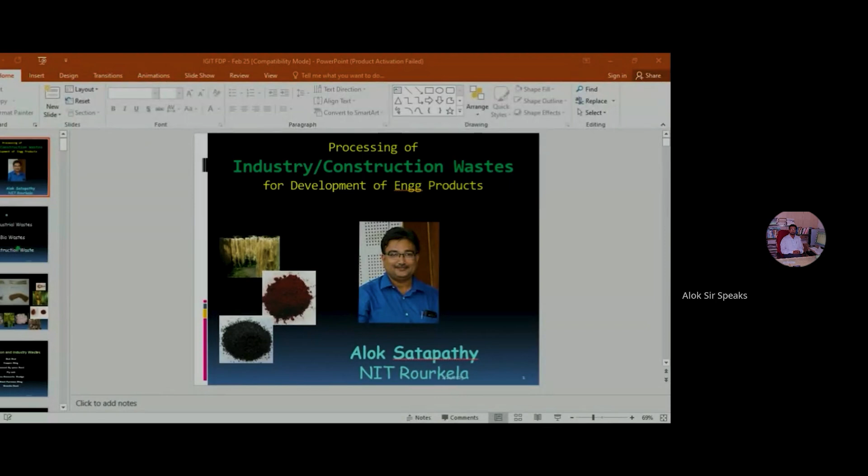My talk today will not be an in-depth talk about any waste to wealth conversion, but through this talk I would like to generate in you certain inspiration or drive, so that you can think of the wastes around you and try to convert them to some kind of valuable product by using proper engineering technique. In this context, we will be discussing waste - industrial waste, bio waste, and construction waste.

Now, what are the different bio wastes and what can we do about it? And what are the different kinds of industrial waste and what can we do about it? We can do many things, but today I'll be talking about two major engineering products. One is how we can use some of these wastes to convert them to polymer composites for various engineering purposes, structural and technical components, and also how to use these industrial or construction wastes for making thermal spray coatings.

Now you can see in the picture a host of natural elements, very common and abundant natural elements. You can see cantala fiber, banana fiber, sisal fiber. Then you can see here the scale of fish.

You can see the feather of a chicken or poultry feathers, a coconut tree and coconut leaves. All these are bioresources, and most of them are considered agricultural or biological wastes in our day-to-day life. All these things can be used, provided we judiciously select the appropriate mode of technology and processes.

Now, some notable construction and industry wastes are red mud, which is a waste from alumina refineries, copper slag, cement bypass dust, fly ash, LD sludge, blast furnace slag, granite dust. The list is in fact very long, and I am only giving a few wastes which are available in our surroundings.

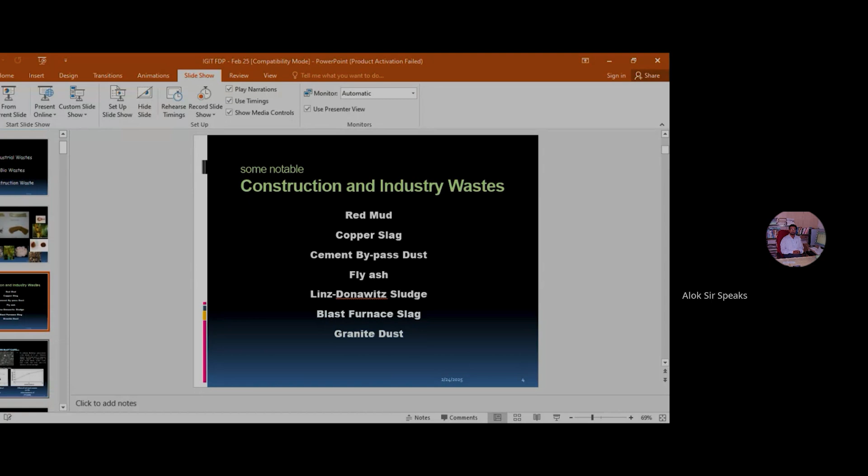Now coming to red mud one by one. Red mud is an aluminium plant, alumina plant waste. Alumina means it is the first step in the extraction of aluminium, conversion of bauxite to alumina, and in the smelter, alumina is further dissociated to form aluminium metal.

Now, our group has tried this red mud as a potential filler in polymer composites, in epoxy, in polyester, and in some thermoplastic materials like polypropylene. We have used red mud as a filler material and got some interesting results. Our purpose was to establish that red mud, in spite of being a waste, can be used for this purpose. Even in my own doctoral work, we have tried to develop coatings out of red mud.

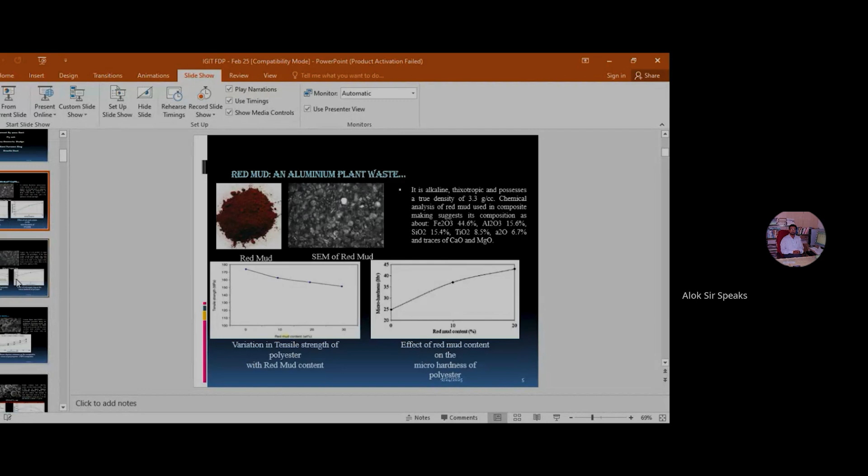Red mud is waste, because normally in coating, the conventional coating materials are very costly. So by using an industrial waste, we reduce the cost of the raw material and develop some kind of product which is comparable with a conventional product.

Copper slag is another waste generated in copper industries, and most of the constituents are metal oxides only - ceramics, iron oxide, silicon oxide, calcium oxide, and so on. Copper slag is generated in a copper extraction plant, and it has also been tried by many researchers, including us, for making polymer composites with different types of polymer matrices.

Another common and abundantly available waste is fly ash. We are all conversant with fly ash bricks - most houses nowadays are constructed with fly ash bricks instead of red brick. Fly ash is the waste generated during the combustion of coal in the power generation process in thermal power plants. In the eastern region of India, most power plants are coal-based, so we have abundantly available fly ash, dumped in the form of hillocks or ponds in the vicinity of the power plant.

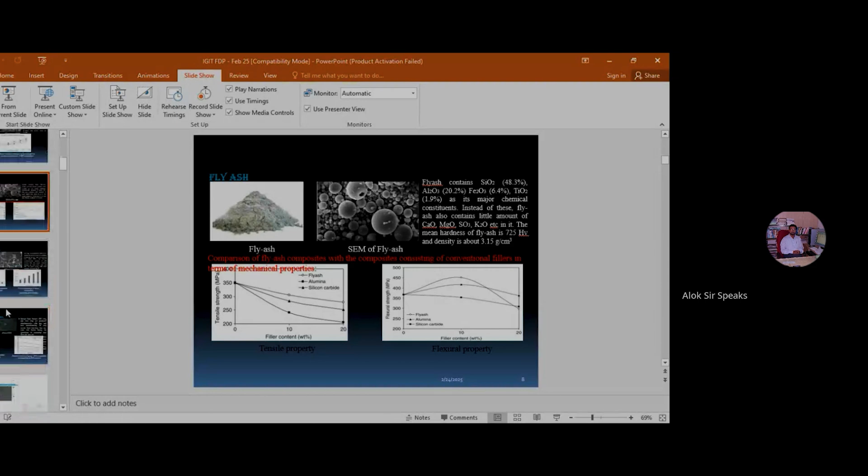Most of the fly ash is used for making bricks, or a part is utilized for making cement. In spite of that, a lot of fly ash is dumped as waste. So researchers have tried to use this fly ash as particulate filler in polymer composites, so that a value-added product can be made out of this waste. Fly ash is again a mixture of ceramic oxides, mostly silica oxide, iron oxide, and aluminum oxide.

Then LD sludge. In steel plants, the iron-to-steel conversion takes place in LD furnaces, and in the process of steel making, there is a sludge or waste developed called LD sludge. LD sludge basically contains iron oxide, calcium oxide, silicon oxide, and so on. And this waste is simply dumped in the steel plant site.

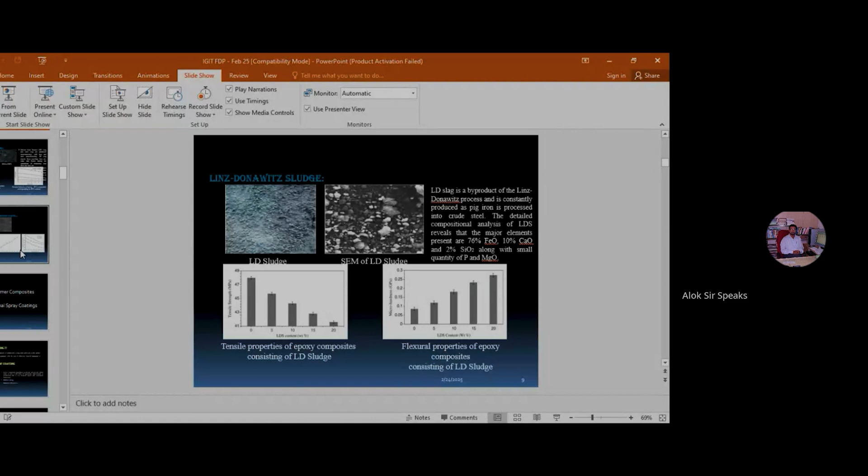I come from a steel city, and we see there a huge deposit or dumping of LD sludge and blast furnace slag all around the steel plant, and their utilization potential is very low. It is hardly being utilized except for pit filling and road making. So we made an attempt to use these in polymer composites, where conventional filler materials are replaced with this waste. In the process, we are successful in reducing the cost of the composite.

Coming to construction waste, what are different construction wastes? So far, the wastes we discussed are industry wastes. Now, if you consider construction waste, the major ones are marble dust and granite dust, because most high-end houses these days are made up of marble.

The floorings are made up of marble or granite, and in the marble and granite processing units, cutting units, there is a huge amount of granite dust and marble dust generated, which creates health hazards. These are not used anyway for any other purpose, but instead they are causing health hazards in the vicinity. People who inhale them while breathing suffer from various diseases.

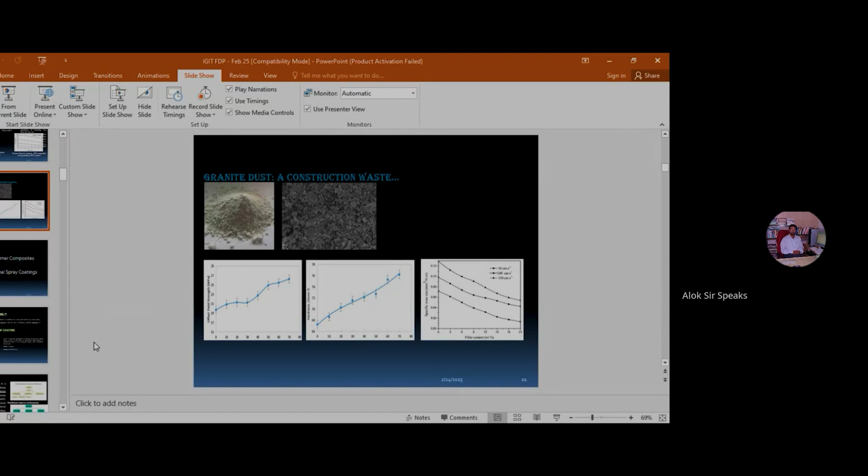So granite dust and marble dust are considered nowadays as potential material for making different engineering products. One such engineering product that we will discuss here for marble dust is polymer composite, and another is high velocity oxyfuel spray coatings made up of marble dust. So basically we will be focusing on these two products: polymer composites in general and thermal spray coatings.

Now, what are these things? What is a coating basically? Coating is a layer of material which is formed naturally or synthetically, or deposited artificially, on the surface of any object made up of another material.

For example, you have a stainless steel substrate, and you want to coat it with a very high or hard material. So you can coat it with aluminum nitride or silicon carbide. Then what happens? The surface becomes very hard, whereas the core is the stainless steel or mild steel. This helps the material or engineering component withstand the environmental attacks which are likely to occur in the process of operation at the workplace.

For example, suppose there are two mild steel machine parts which are in relative motion with each other. There will be friction, wear and tear, and after some time what will happen? They wear out from the surface, and there will be noise, mismatch in dimension, more energy loss, unnecessary heat generation - all those problems will come.

But if you coat them with some harder material, say titanium nitride, what happens? The surface of both members becomes very strong, very hard. When they become very hard, then in spite of repeated sliding, the rate of wear and tear will become drastically reduced.

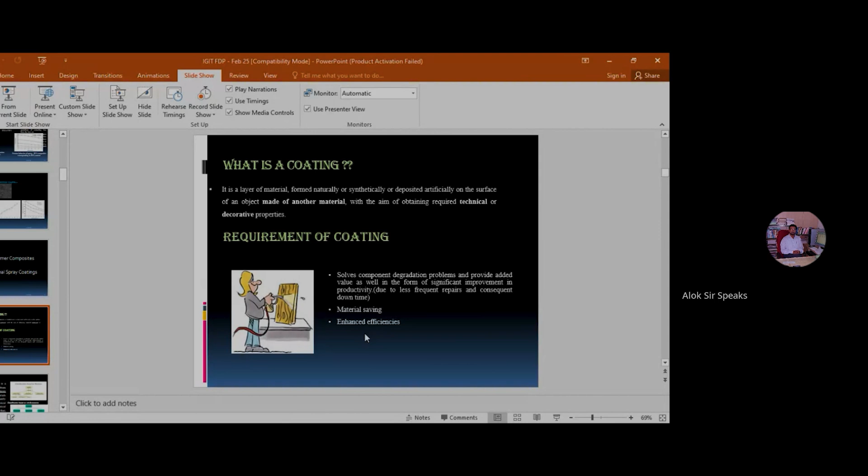So this is one use - thermal spray coating. What is a composite? Because we will be discussing two uses of this industrial waste - one is coating, one is composite. What is a composite? Composite is a little different from alloy, solution, and mixtures.

Composite is a material made up of two or more constituent materials - there can be two, there can be more than two - which have significantly different physical and chemical properties. When combined, they produce a material with characteristics different from the individual constituents. You are mixing two materials, but they do not lose their chemical and physical identity. They remain together, form a rigid structure, and we call it composite. One basic condition in making a composite is that one of the constituents should not get dissolved in the other.

Depending on what is mixed with what - for example, if you are mixing glass fiber in epoxy, then glass fiber is the reinforcement and epoxy is the matrix material. Similarly, if you have a ceramic material as the matrix, you can call it ceramic matrix composite. If you have a polymer as the matrix material, you call it polymer matrix composite. And similarly, if you have a metal as the matrix material, you can call it metal matrix composite.

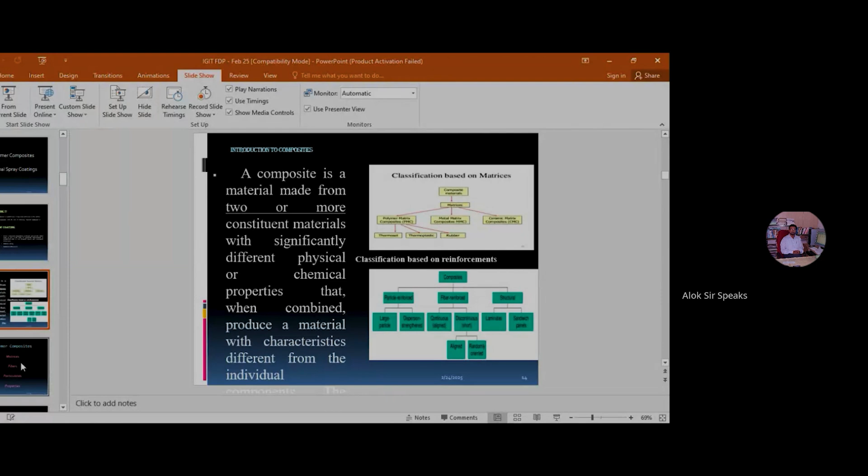So there are different composites: ceramic matrix composite, metal matrix composite, and polymer matrix composite. Similarly, in case of reinforcement, there can be fiber reinforced composites, polymer reinforced composite, particulate reinforced composite, flake reinforced composite, depending on what you have. So polymer composite can be determined or analyzed based on the matrix material. Matrix material is the main binder material - the base material on which the composite is fabricated is called the matrix material.

In case of a glass fiber epoxy composite, epoxy is the matrix material. In case of an aluminum silicon carbide composite, aluminum is the matrix material - the metallic matrix - and silicon carbide is the reinforcement.

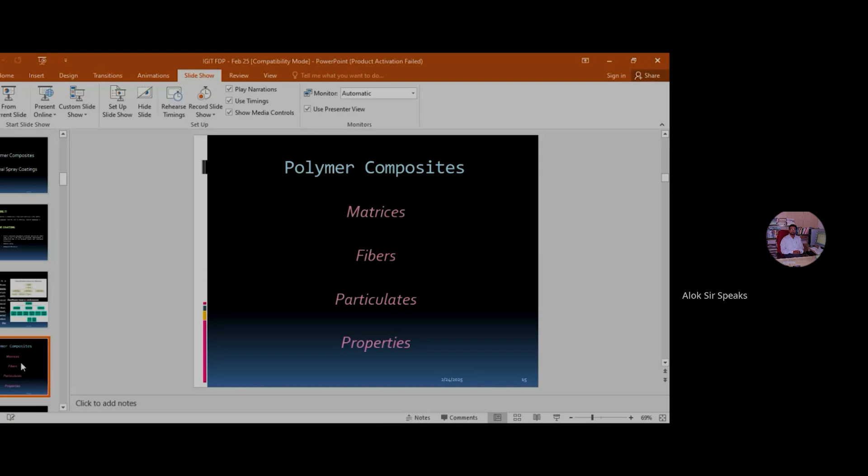Now, if you do not use fibers, you can also make composites using particulates, which are particles, powder form, or dust. These particulates can be reinforced in matrix material to form composites. The properties of fiber reinforced composites, particulate reinforced composites, composites with different matrices, different fibers, different types of particulates, and different content of particulates all decide what the properties of the composite will be.

Now, as we discussed, matrices are the main binder in a composite material. Matrix can be metallic, ceramic, or polymeric. Depending on this, composites are called PMC, CMC, or MMC. But again, if you come to polymer matrices, they can be different.

The matrices can be thermoset matrix or thermoplastic matrix. For example, epoxy, polyester, vinyl ester, and phenolic resin are all thermoset matrices. And nylon, polypropylene, polyether ketone are the matrices coming under thermoplastics.

Coming to fibers, the broad classification is whether they are synthesized, man-made, artificial, or natural. Natural means the fibers are extracted from natural resources - for example, coconut leaf fiber, coconut coir fiber, jute fiber, or bamboo fibers. These are extracted from plant resources, so they are called natural fibers, and often also called green fibers. The composites made from green fibers are called green composites or natural fiber composites.

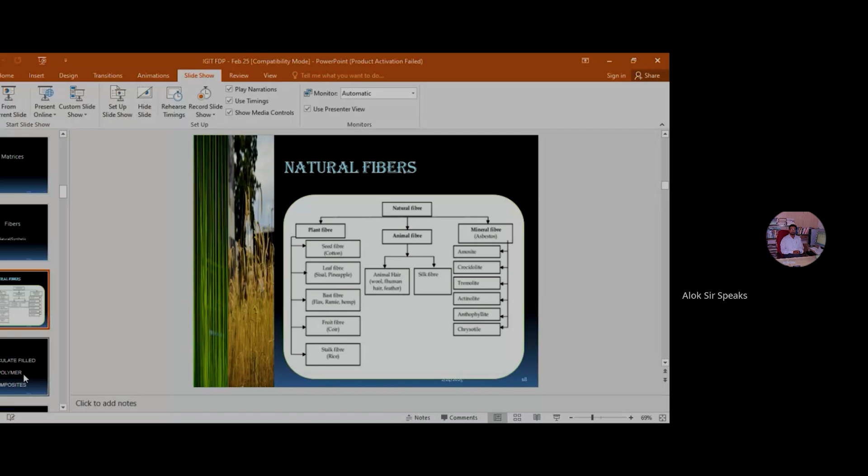Now, natural fiber, as I told you, can be sourced from animals, mineral resources, or plants. The fibers extracted from animal sources include horsehair. From bird species you can extract feathers. It's a very interesting fiber and very little work has been done on it. Those interested in doing work on natural fiber - the most promising area now is feather-based fibers. We have done some work with poultry feather, chicken feather, but other feathers can also be tried, and they give very wonderful results.

Then coming to particulate filled polymer composites, the nature of these composites is slightly different, slightly different in configuration from fiber reinforced composites. In fiber reinforced composites, small or long fibers are reinforced within the matrix body. But in particulate filled polymer composites, in place of fibers, you have powders, small particles. Depending on how small the particle is, you can call them macro particulate, microparticulate, or nanoparticulate composites - if the dimension is in the order of nano, we call them nanoparticulate composites.

So particulate filled composites have their own advantages and disadvantages. First of all, if you use particulates in place of fibers, it is basically done to improve mechanical properties like hardness, impact strength, and compressive strength.

Suppose you are using a harder material. Say, for example, if you are taking silicon carbide in epoxy, then the hardness of the epoxy composite will improve drastically, because silicon carbide is hard and epoxy's hardness is very low. So you are incorporating some hard material, and obviously the bulk hardness of the composite will increase, along with the impact strength and compressive strength.

Sometimes you want the composite to be thermally insulative or thermally conductive, or electrically insulative or electrically conductive. Accordingly, the right kind of particulates is to be incorporated in the matrix so that you get the right resulting properties. Suppose you want some polymer composite to show lower coefficient of thermal expansion, then you have to select a particulate that has intrinsic lower CTE.

Or sometimes particulates improve the glass transition temperature of the polymer. So there are various reasons why particulate composites are found to be in use in polymers, because of this enhancement of these properties.

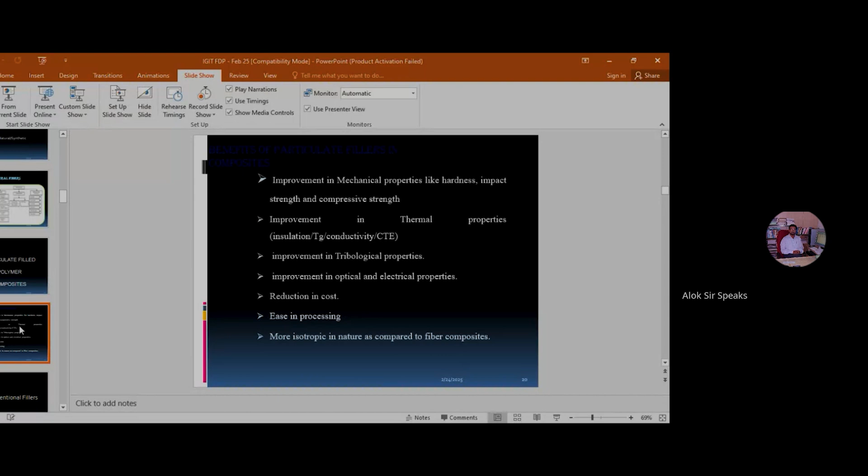One more important thing is that with particulate filled composites, you get a product which is more isotropic in nature. Isotropic means the product will exhibit the same properties in all directions; the properties do not differ from direction to direction. Most fiber reinforced composites are anisotropic in nature, but when you are making particulate filled composites, they are relatively less anisotropic, or we can say more isotropic, compared to fiber reinforced composites.

Now, what are these particulates? Which particulates are being used? Conventionally, in the world of polymer composites, if you go for particulate filled composites, the conventional fillers are oxide ceramics, nitride ceramics, carbide ceramics like silicon carbide, titanium nitride, aluminum nitride, boron nitride, then aluminum oxide, iron oxide, silicon oxide, chromia or chromium oxide, and yttrium oxide. So these are the conventional fillers.

Conventional means they have specific properties, and the benefits of these properties are taken by incorporating these fillers into the polymer. Now, all these fillers that I have listed out are all expensive, because they are synthesized and purchased from the market, and they will have uniform size and shape, and they're costly.

But if you are able to replace them with industry waste, then what is happening? The filler cost is drastically reduced, which is actually reducing the overall composite cost.

So that cost can be saved by using construction waste or industrial waste, provided that waste also gives comparable properties. Not that everything has to be replaced. Anyway, we will discuss polymer composites using construction and industry waste, and let me tell out what is the research scope and applications.

I have listed out some construction waste such as granite dust and marble dust. These dusts are wastes because they are generated at the time of marble cutting in the cutting processing units, or granite cutting, and these wastes are not used at all. They are dumped in the site, just thrown down the drain, and they cause human health hazards.

Similarly, industry waste, most of the industry wastes are dumped in the plant site, and they not only pollute the land, they pollute the environment. And even though they are used for various purposes, the utilization potential of many industrial waste in India and throughout the globe is small.

For example, fly ash is very widely used, but still the utilization potential of fly ash is only 60 to 70%. So that means 30% of fly ash generated throughout the globe is still lying unused. And forget about blast furnace slag and LD slag and all, their utilization potential is still lower.

What I am trying to impress upon you is not to show our knowledge or our work to you, but to impress upon you that there is a large research scope, a promising scope in this area, where you can select the waste and try to use them in some engineering processes to make a valuable product. Here I am discussing only two things: one is coating, and one is making polymer composites. But there can be several other options which can be explored. That is my purpose of sharing my ideas with you.

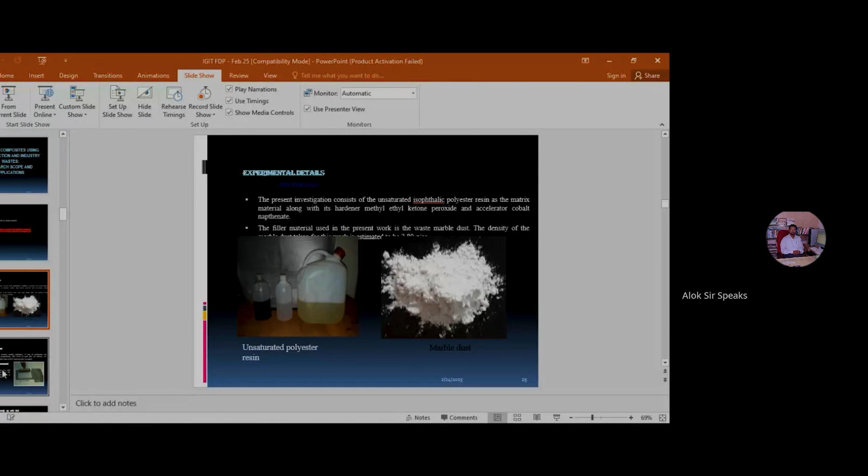Now this is a picture of the polyester, unsaturated polyester resin which is available in the market, and this is marble dust. Marble dust, as I told you, is generated in the marble cutting industries, and these marble dust are sieved to obtain micro-sized particles, 58 micron, 110 micron, 155 micron, like that.

So three different size ranges of marble dust were obtained, and then we made the composite by a process called hand layup technique, or solution casting technique. In solution casting, if you have a beaker where you put the polyester which is liquid, then put the marble dust and stir it, and then add the right proportion of cobalt naphthenate, which is the accelerator and hardener, then within 24 hours it gets hardened and gives you the composite.

Another thing is that you can also hybridize it. Hybridization means, as I told you, particulate composites cannot give you strength, so you have to hybridize it with a fiber. What we did, we took polyester glass fiber composite, and in the polyester glass fiber composite itself, we incorporated marble dust. So we got not only a hard composite, but also a strong composite, capable of withstanding or sharing the axial pull load along with the impact load. That's the beauty of hybridization.

Hybridization simply means incorporating two reinforcing elements instead of one. In a pure particulate filled composite, you are incorporating only particulate in epoxy. In a pure fiber reinforced composite, you are incorporating a fiber into epoxy, nothing else. But in a hybrid composite, you are reinforcing fiber along with a particulate or dust material with the polymer.

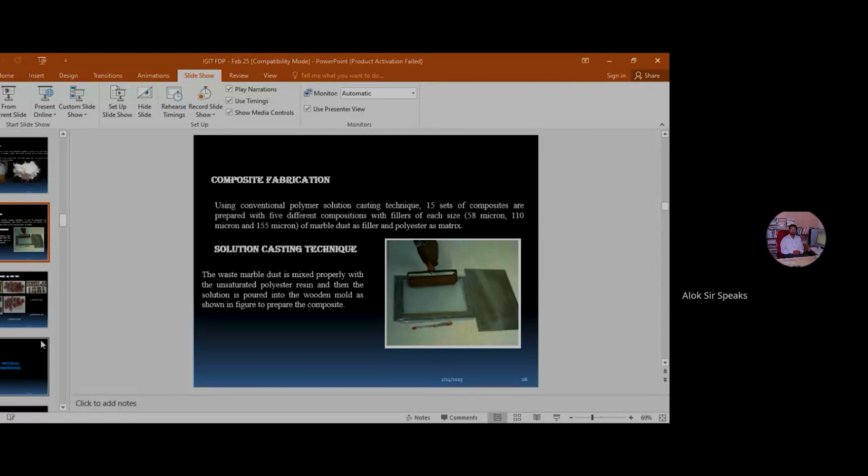What is tribological purpose? It means tribological applications, where friction and wear play a very important role. That means the material degrades because of repeated friction and wear, and if we can replace the conventional material with a hard material, then perhaps the life would increase.

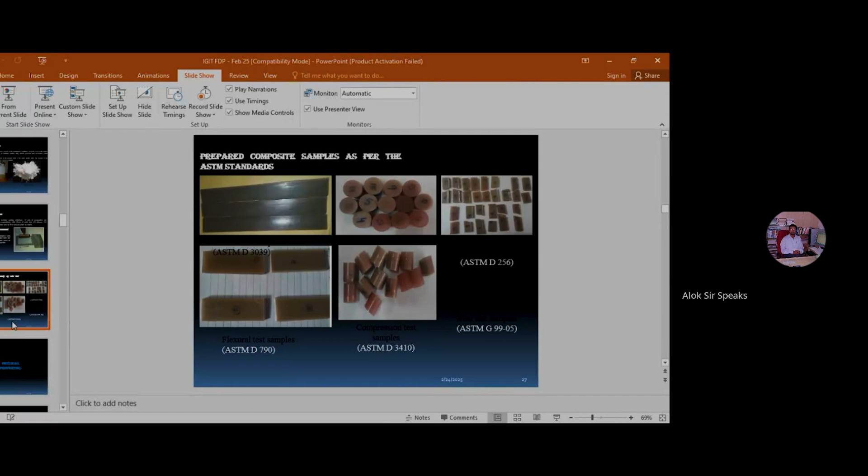That was the purpose. Now, in physical properties, once you make a composite - this is for people interested in working with composites - you select a raw material, the matrix, the particulate and the fiber, and make a hybrid composite. Once made, the composite is to be evaluated in terms of its properties.

So the basic few properties to be evaluated are physical properties, like density, because composites are supposed to be lightweight materials. Lightweight means their density should be less than metallic composites. So density measurement is very essential.

Density measurement also gives us information that during the process of making the composite, there may get created certain voids or empty spaces because of entrapped gas and air, which might affect the strength of the composite. By measuring the density practically and calculating the theoretical density, the difference can be taken as the presence of voids.

So we can find out the volume fraction of voids present in a particular composite, and the more the volume fraction, the less the strength will be. So care is always to be taken to reduce the volume fraction of voids in any composite.

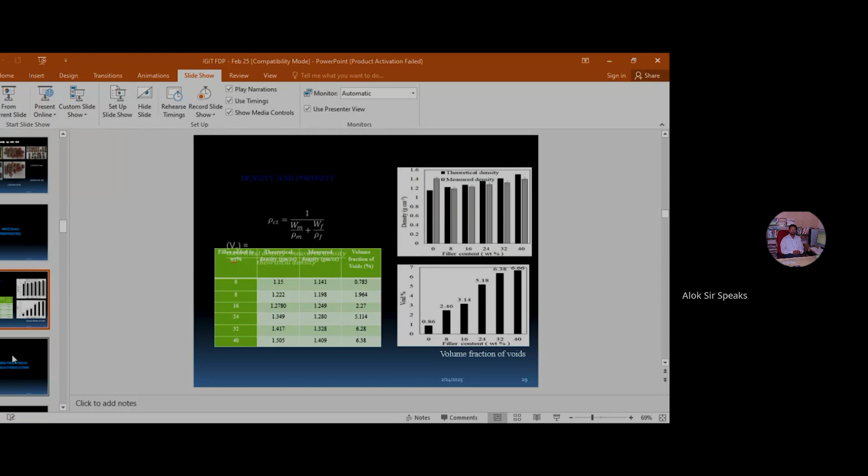There are irregular, sharp edged corners of the particles which are not getting fully wetted by the liquid polymer, and so on. There are various regions which need further investigation.

Now, once the physical characterization is done, microstructural characterization is very pertinent to do, because it gives us insight into what is happening within the composite. So we can go for scanning electron microscopy.

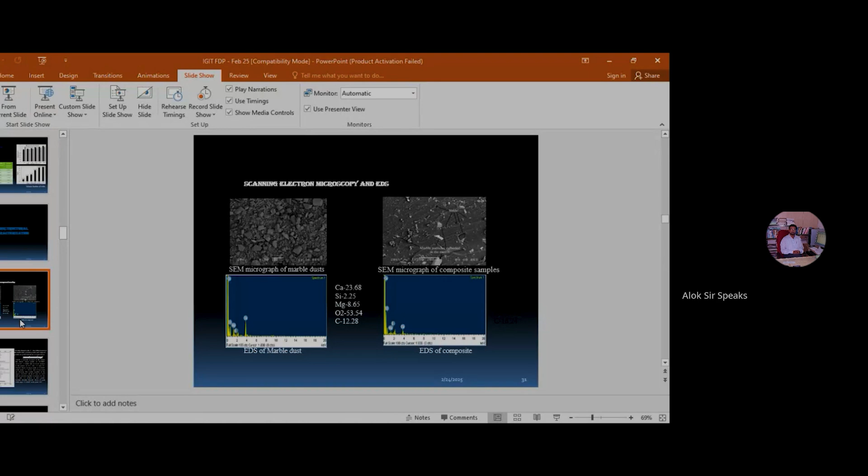The diagrams below are the EDS mapping showing the elemental features - what elements are present in the raw material, that is the filler, and the composite. It is basically calcium, silicon, magnesium, oxygen, and carbon.

Now, because we are interested in improving the hardness of the material, it is pertinent to identify the phases present in the composite, because marble dust is not a uniform material - it is a mixture of various oxides, and these oxides are in various phases.

During the process of composite formation, the marble dust is spread across the composite, and when we do XRD, we know what different phases are present. We see that in the composite, the different phases are calcite, hematite, silica, and quartz, and individually all these phases are hard phases, making the composite harder compared to the individual constituents.

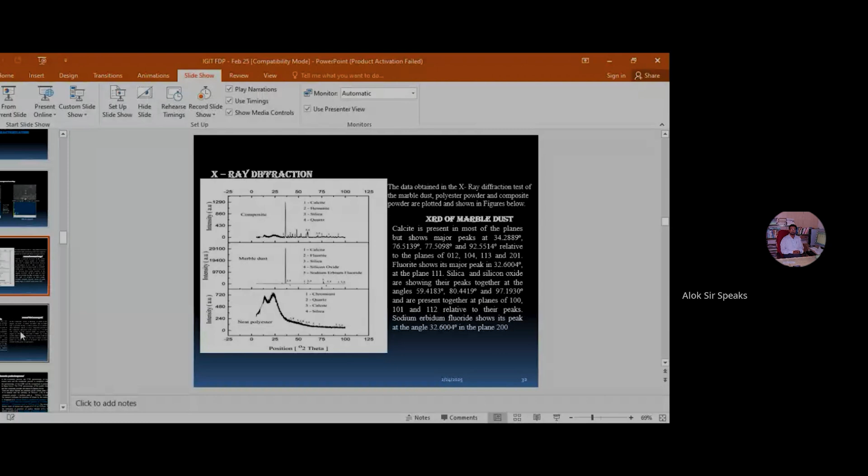Individual constituents means polyester and marble dust - the composite is harder than the polyester. Now, X-ray diffraction is a must after the density measurement.

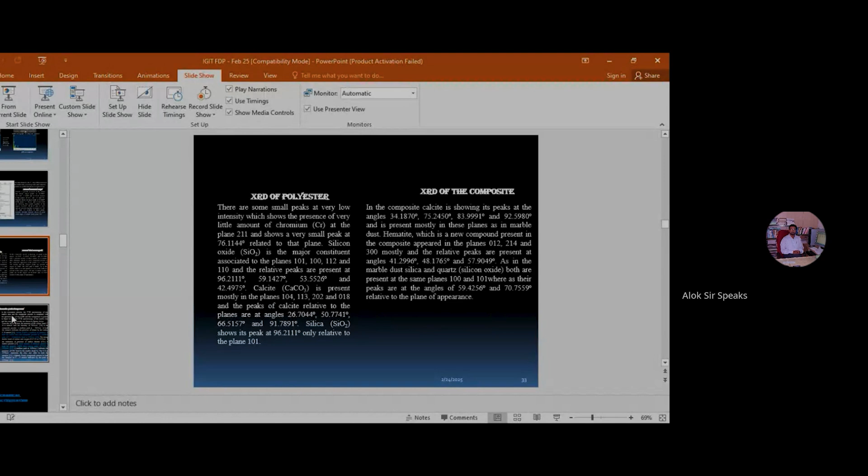Although we say that composite is a combination of two materials, one matrix and one reinforcement, not any material can be mixed with any material to form a composite. The pair has to be judiciously decided, and there must be some kind of bonding mechanism so that the composite fabrication is long lasting. Otherwise, if the bonds are loose, the composite will only be a mixture, it cannot be a rigid structure of different constituents.

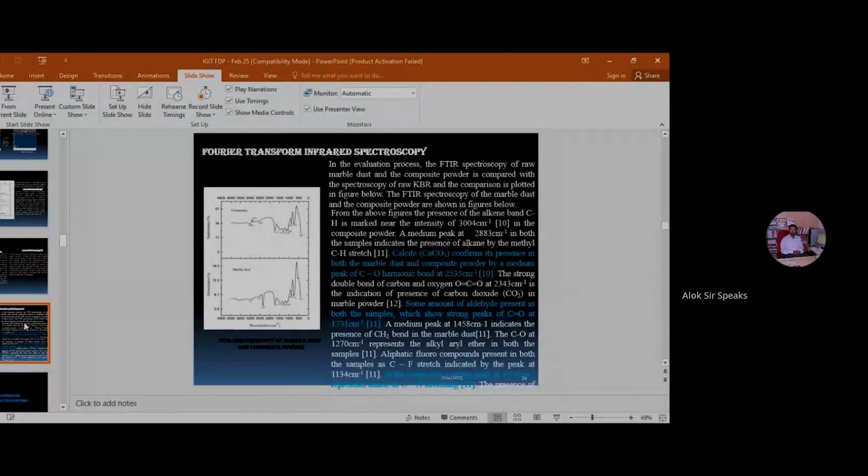So for that, chemical analysis is done. Chemical analysis means an insight into the chemistry of the different constituents is required, which is carried out by Fourier Transform Infrared Spectroscopy. This FTIR spectroscopy is not the cup of tea for mechanical engineers, but it is done in a chemistry lab or material science lab to find out what functional groups are present in the constituent materials, so that the chemistry of bond formation can be ascertained.

What is important to us, the mechanical engineers, is the mechanical characterization of the composite. After physical density measurement and microstructural characterization, mechanical characterization is a must for any composite we make. In the mechanical category, we have to find out the tensile strength, compressive strength, impact strength, and if it is a laminated composite, the interlaminar shear strength. It is very important, because strength property evaluation is a key part of composite characterization.

Unless you know the strength, how can we use it for a particular purpose? So we must know different strength values, such as tensile, compressive, impact, and interlaminar. All these things are to be evaluated as per specified ASTM standards, American Society for Testing and Materials. The specimens are made as per the respective ASTM standards, using standard machines like the universal testing machine and the impact tester, for finding out the values of these composites.

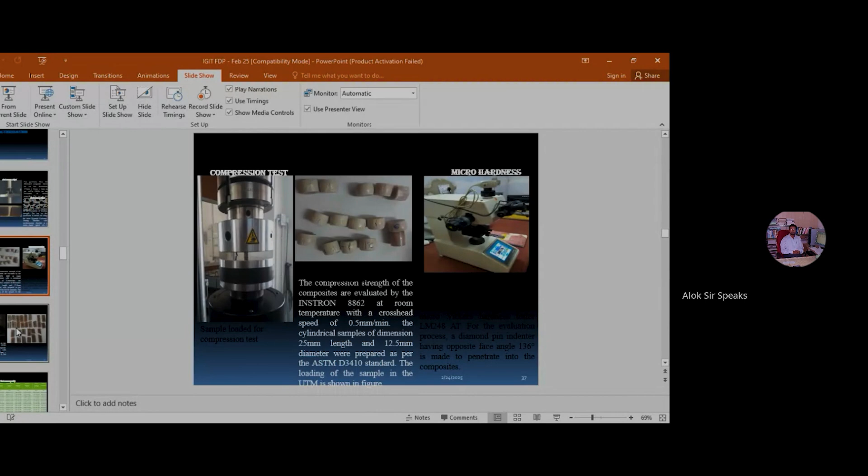It is also important to know the compressive strength, because tensile and compressive strength will vary. If the fiber content is more, it is expected that it will be very strong in tension. If the particulates are harder, it is expected that the compressive strength will be more. But that is to be ascertained - how much more or how much less - by proper evaluation.

Now, impact test - because in the workplace, wherever the composite will be used in engineering applications, it is very likely they may experience some kind of impact during the operational tenure. A lower impact strength of the composite may lead to failure of the material. Therefore, the impact strength is to be ascertained by a properly designed impact test, and the Izod impact tester is normally used for this.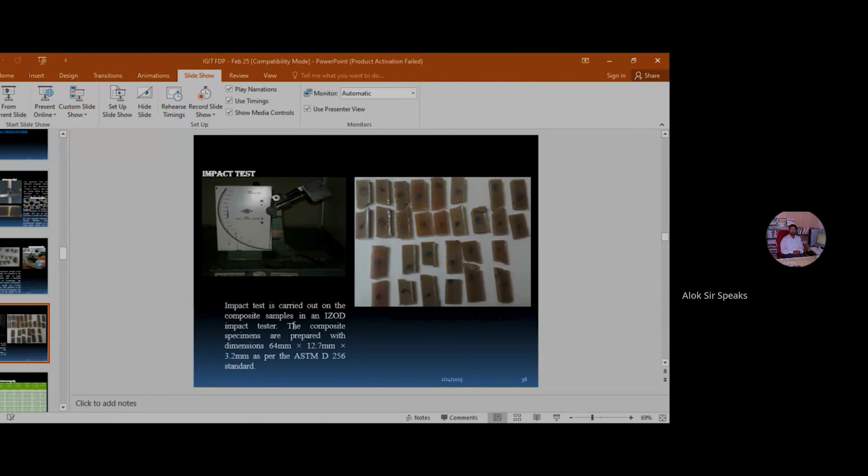It was done with a purpose to find out whether the particle size has an impact on the properties or not, and we found that it has. If the particle size is less, we found that the strength is more; if the particle size is more, the strength is less. There are specific reasons for that which need special kind of investigation.

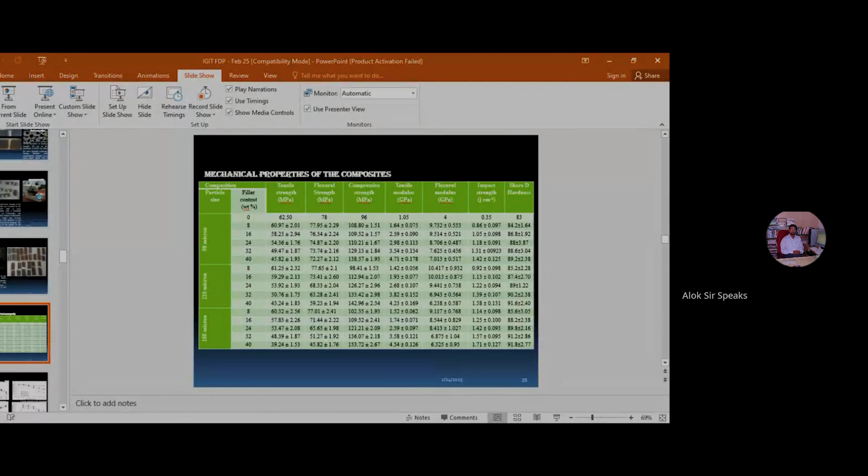The same holds for tensile strength, flexural strength, impact strength, and their moduli, because size and shape have a very prominent role in affecting strength property values. These are the variations of the different strength properties in a graphical chart. You can see the composite with 58 micron, 110 micron, and 155 micron particulates are different - the properties differ, although they appear similar up to a certain point. After a filler content of more than 16%, they start differing.

Depending on what flexural strength, tensile strength, or modulus you need for a particular application, you can tailor make the composite accordingly. This graph helps us find a particular composite required to exhibit a specific tensile strength. For example, if we want a composite exhibiting a tensile strength of 60 megapascal, we will take 8% filler content, and either 58 micron or 155 micron particle size depending on the availability of the particulate filler.

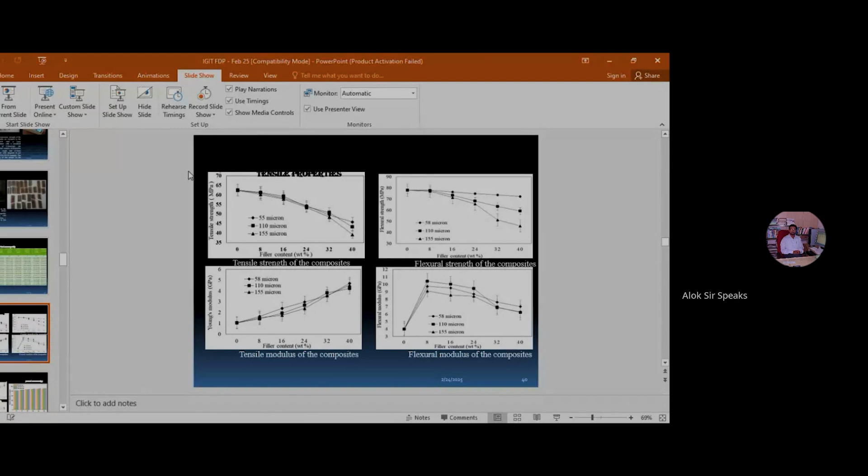Similarly, the hardness can be measured either by Vickers hardness, Shore hardness, or Brinell hardness, depending on the availability of the instrument. You can see that the hardness also gets affected, though marginally, by the size of the particle.

The size of the particle, shape of the particle, content of particle—how much content, 8%, 16%, 24%—that is to be decided very precisely and judiciously depending on the requirement. It's not that 24% is good and 8% is bad. First we have to see what is our requirement, and once we see the requirement, accordingly we can design the material.

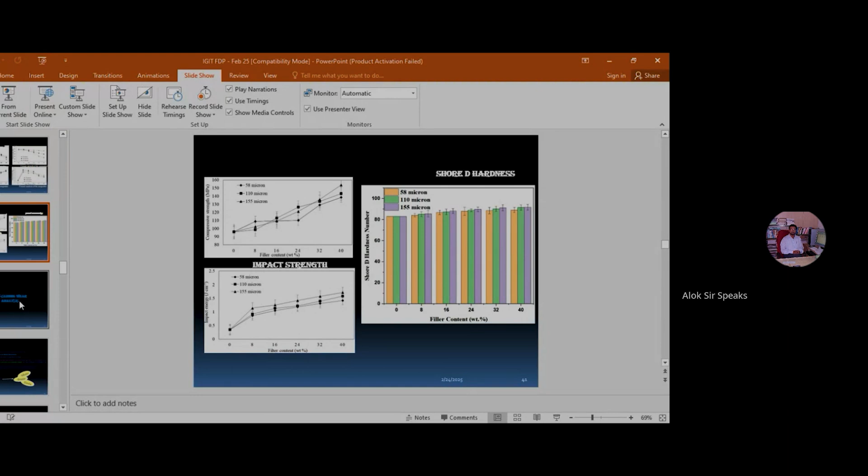For this particular marble dust reinforced composite, our target, as I told in the beginning, was to find out its dry sliding wear characteristics. So dry sliding wear characteristics are to be evaluated by a sliding wear test.

In this context, let me very briefly tell what is wear. Wear is a word very common to mechanical engineers. It is a progressive loss of material from the surface of any component, and it happens due to the relative motion between two surfaces. In a more common term, we can say the loss arising out of friction, and to industry, this friction loss or wear loss is a very high cost element.

Basically, there are three wear modes: adhesion, abrasion, and erosion. There are other wear modes as well, but broadly we can categorize them as adhesion, abrasion, and erosion.

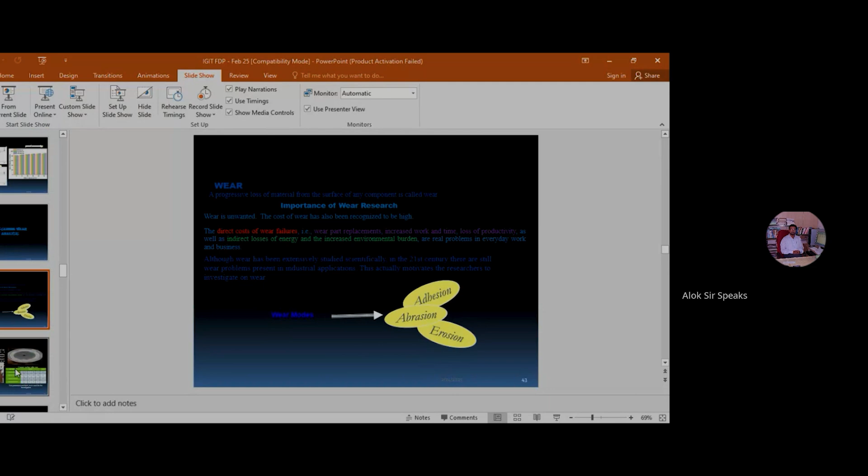Dry sliding wear is an adhesion wear mode, and the dry sliding wear properties of the composites can be evaluated by a pin-on-disc wear testing apparatus, where a disc will be rotating and the pin, made out of the composite material, is brought into contact with the rotating disc. Time to time, the wear loss, or mass loss, or volume loss due to wear, is measured.

Here there are different players which affect the wear rate, and they are the sliding speed, sliding distance, normal load, filler content, etc.

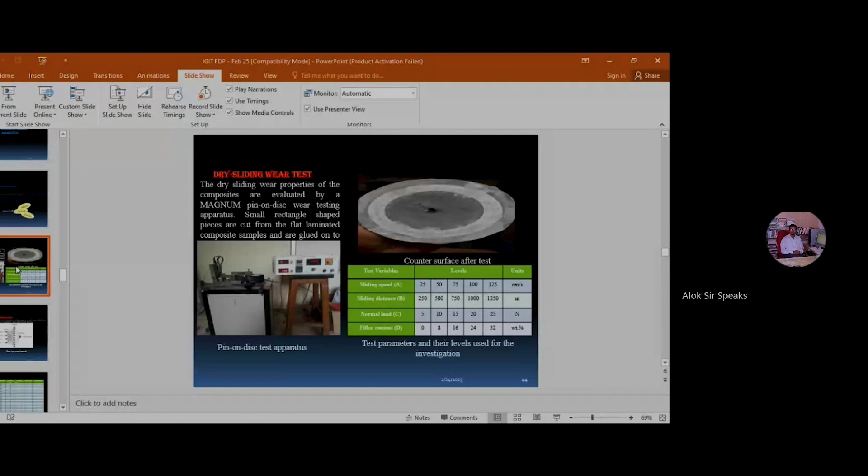Once you take the readings at different levels of sliding speed, sliding distance, normal load, and filler content, we can find out the wear rate. The wear rate is basically expressed as specific wear rate, whose unit is millimeter cube per Newton meter, where Newton is the normal applied load and meter is the unit for the sliding distance.

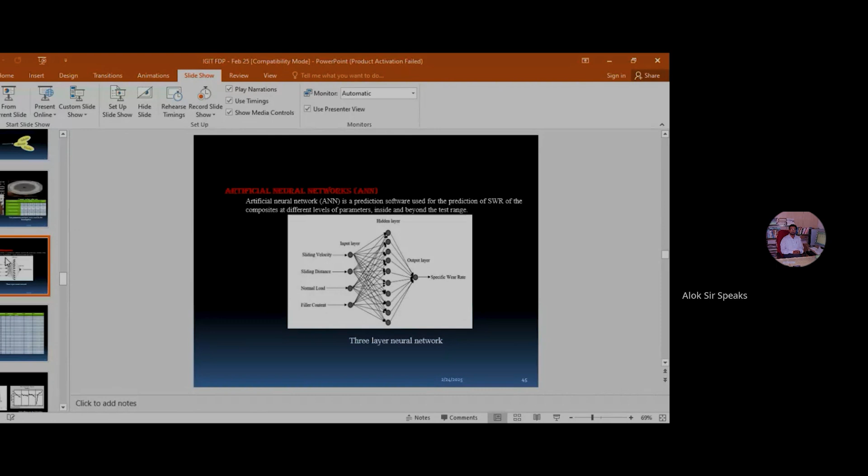Once the specific wear rate is calculated, even if you take it for a small number of experiments, by using a neural network you can generate more data for specific wear rate for a range of input variables within and beyond the experimental domain. For example, if sliding velocity in the experiment is taken from 25 to 100 meters per second, using an artificial neural network you can predict the wear rate for say 25 to 300 meters per second. You can expand it—it's kind of extrapolation, but extrapolation with logic.

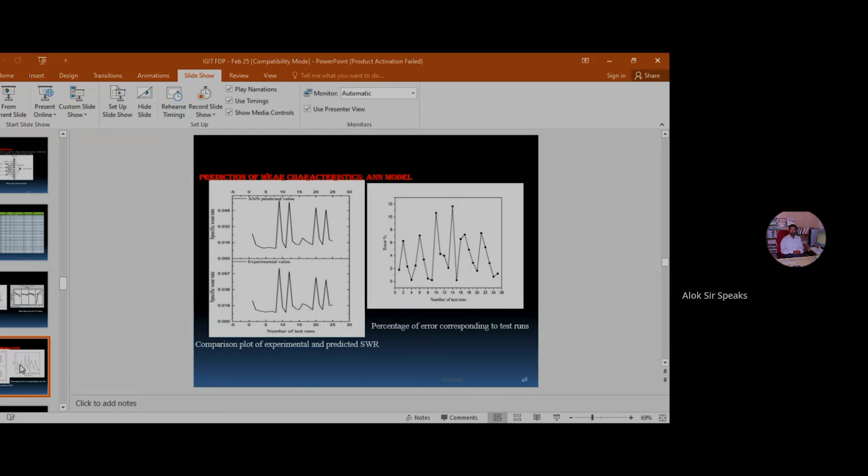Coming back to the overall analysis, since the particulate filler is the most important factor affecting the wear rate, if you can select the particulate filler in a right and judicious manner, then your composite will be a perfect composite to combat friction and wear.

Now these are some of the data where the artificial neural network is used for simulation purposes. You can simulate it—the ANN predicted specific wear rate for different sliding velocity and for different filler content.

This is for different filler content at different sliding velocities. So such simulations can be obtained.

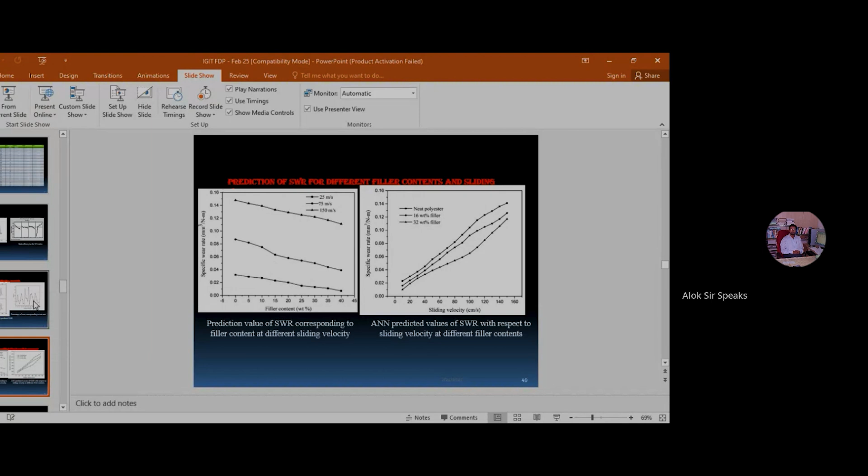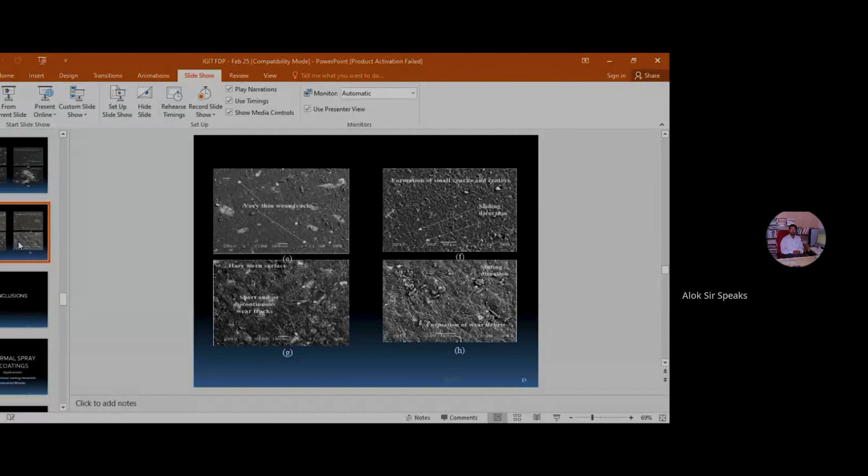Once you have insight into the damage mechanism, it becomes easier for the engineer to rightly design the material. So in the first part, we can conclude that industrial waste and construction waste can be used for making polymer composites and gainfully used. They not only reduce the cost, they also improve the functional properties and ease of processing, and they provide a secondary benefit, the disposal of industrial waste.

Very briefly, I am touching the second part. The second part is thermal spray coatings. Like we can use waste material or construction waste material for polymer composites, we can also use it for thermal spray coatings. Now, thermal spray coatings are

widely used in industries, and there is hardly any engineering surface which is not coated, because surface treatment has to be done on every engineering component, and coating is one of the most widely used surface modification techniques. But the conventional coating materials, which are zirconia, silicon carbide, aluminum nitride, titanium nitride, borides, and some oxides, are all very costly.

They are spray grade powders, and these spray grade powders are very costly. In a coating or spraying activity, 50 to 65% of the cost goes to the cost of the spray grade powders.

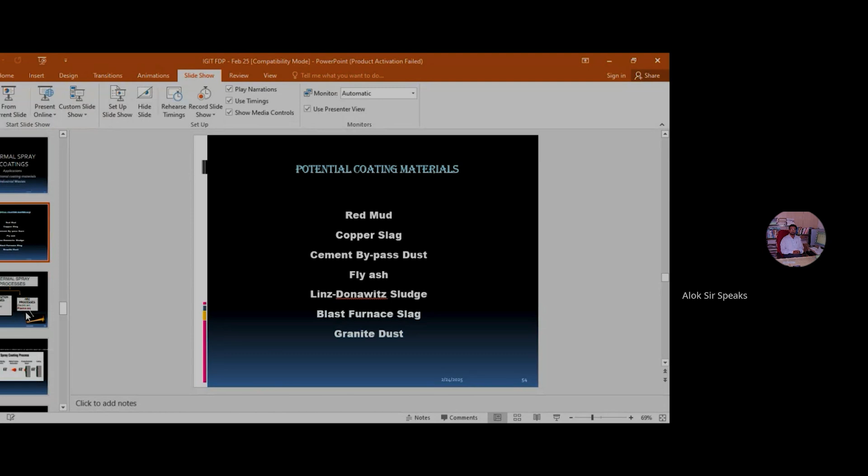These are the list of waste materials, but all of these waste materials have not been coated so far. There is still room for research; for example, to the best of my knowledge, copper slag has not yet been coated, blast furnace slag is not yet coated, and granite dusts are not yet coated. So these are the free areas where research can be done and promising results can be obtained.

Now, what is thermal spray coating? It means if you want to coat any material on any other material, you first have to melt it and accelerate it in a particular direction to get it deposited on the target surface. That melting can be done either by a gas combustion process or by arc processes. If it is a gas combustion process, accordingly you call it oxyfuel, detonation gun spraying, or high velocity oxyfuel spraying. If it's an arc process, you can call it electric arc spraying or plasma arc spraying, depending on the source.

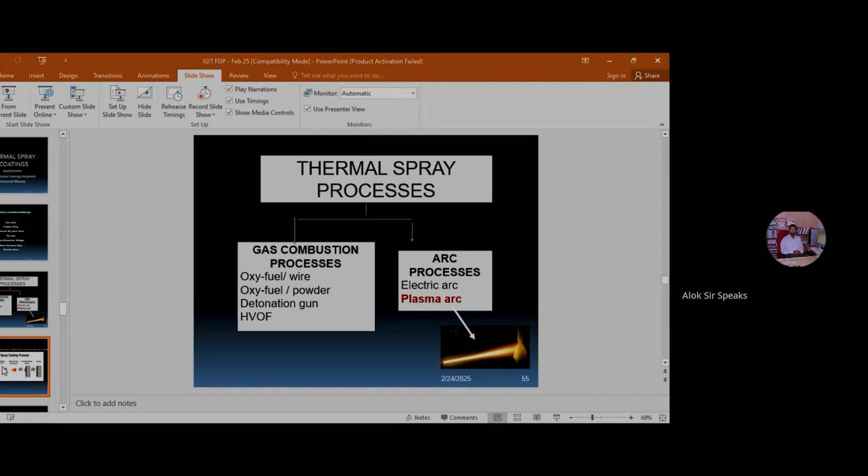Now the process fundamentals are shown here. You can see there is a powder feedstock which is to be coated. Then powder particle melting takes place because of absorption of heat. The heat source can be plasma, a flame, combustion of gas, or a detonation or explosion. Depending on the heat source, the thermal spray coating process is named after the heat source.

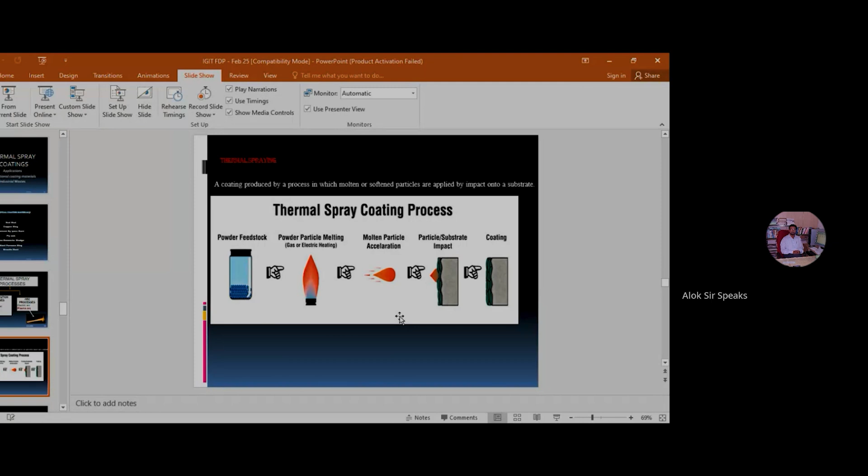So plasma spray coating and high velocity oxyfuel coating are essentially the same thing; the only difference is that melting of the powder takes place by different heat sources. This is the sequence of operation: the powder particle will melt, then it will be accelerated towards the target surface. When it hits the target surface, it forms a splat. The splat in course of time gets cooled and solidifies. When solidified, it sticks to the substrate surface, and subsequent deposition of such splats forms a layer of coating. These are the process fundamentals.

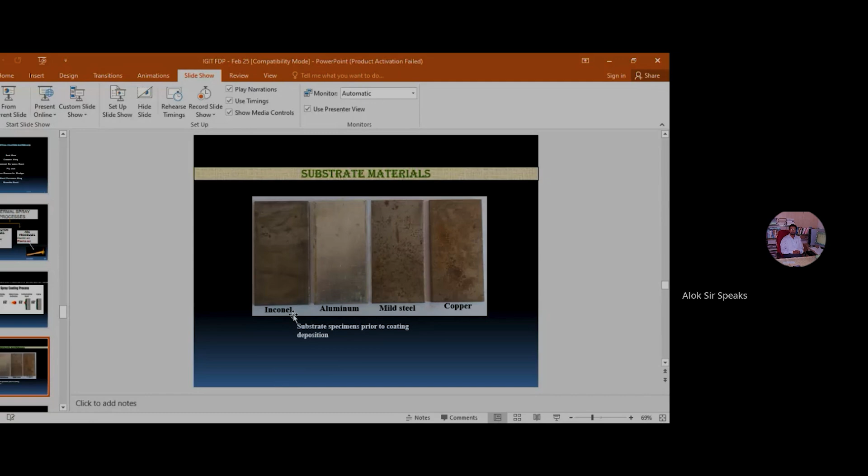Now I'll show you some coated samples. These are the coated samples, showing substrate deposition and coated samples. We have tried with marble dust as the coating material. These are the specimens prior to coating: mild steel, aluminum, inconel, and copper. Then the coating can be done.

Feedstock material, the raw marble dust, and nickel chrome powder was added because sometimes the bonding is not proper with only marble dust. So some binder material is premixed, that is NiCr, nickel chromium powder, with particle size ranging from 10 to 20 micron, and here the particle sizes are different.

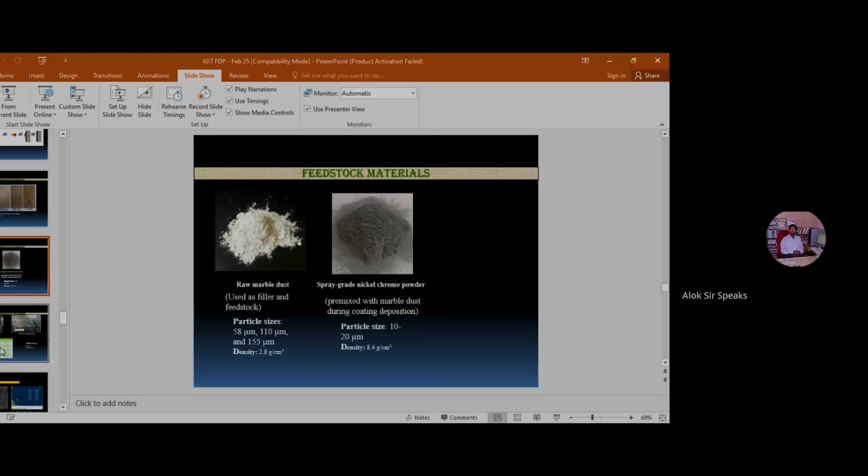Now they are deposited in a lab where a high velocity oxyfuel flame is generated, and this flame is responsible for melting the marble dust and nickel chromium powder, and these molten particles are accelerated towards the target surface. In the table below you can see the input parameters which are varied within permissible ranges: spray distance, powder feed rate, LPG gas feed rate, oxygen feed rate, air feed rate, etc. And accordingly the coating is made.

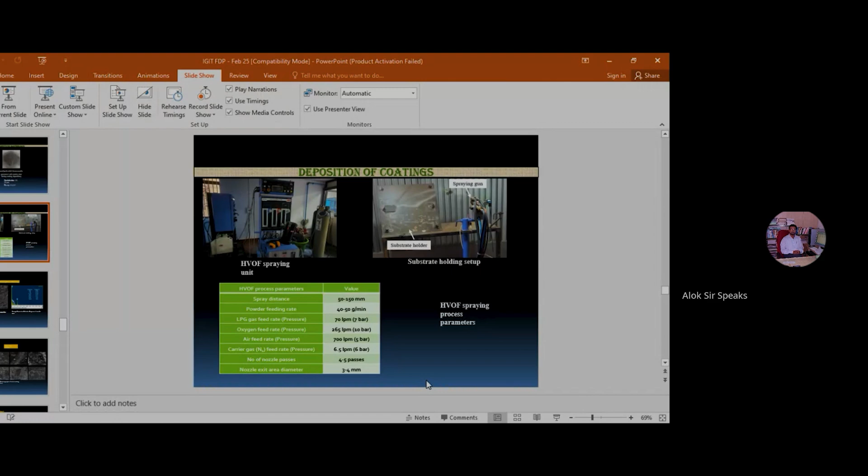The beauty of the coating process is that it is very fast. Very soon, in seconds or minutes, the coating process is over, and a beautiful layer of hard coating can be obtained on a softer material. For example, aluminum is a very soft material, whereas this marble dust and nickel chromium coating is a harder material, and they are deposited on this. So the surface becomes hard, and it is now in a position to resist any kind of frictional attack or environmental attack, where the chances of wear loss were prominent before.

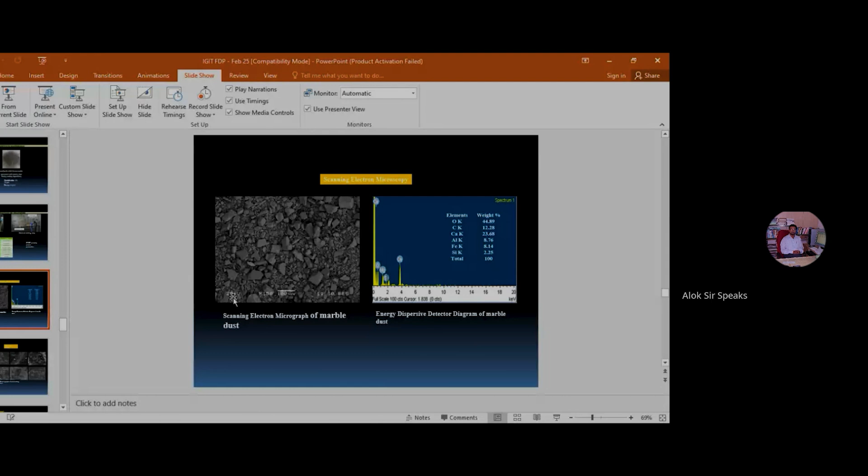So what applications can these thermal spraying samples have? They can be used for reclamation, repairing, or building up of the worn damaged surface. Undercoat for a paint. They can be used for electrical conductance, if it is a conducting material, and for electrical insulation as well. They can be used for wear resistance, corrosion resistance, heat resistance, and heat insulation. Depending on what property you want from the material, you accordingly have to choose the coating material.

Out of the industrial waste and construction waste available to us, that list is also huge. So we have to analyze every waste and find out if it has the requisite property or not. If it has the property, then we can select it. Maybe we can add an additive from the conventional domain and then make a composite using a thermal-based technique. It can be plasma, flame, oxy fuel spraying, or explosion, like that.

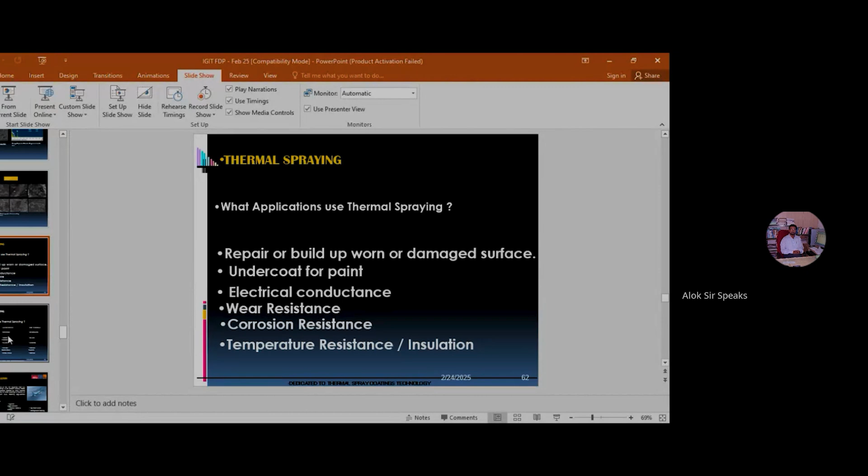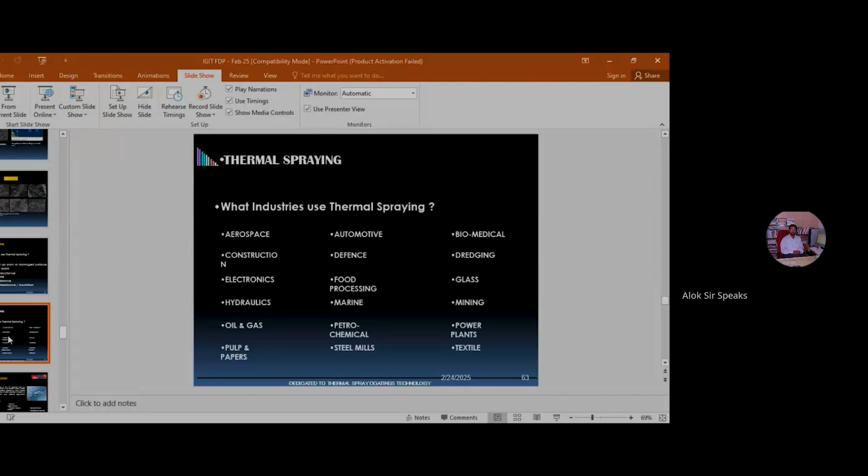The industries which use thermal spraying, the list is huge, and there is hardly any industry which does not use these thermal spray components. So you have aerospace, construction industries, electronics, hydraulics, oil, gas, pulp and paper. The list is very long, as I told you.

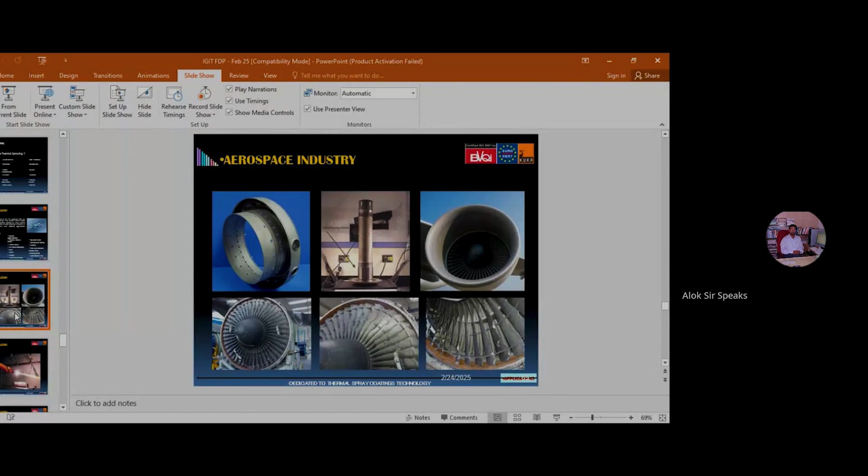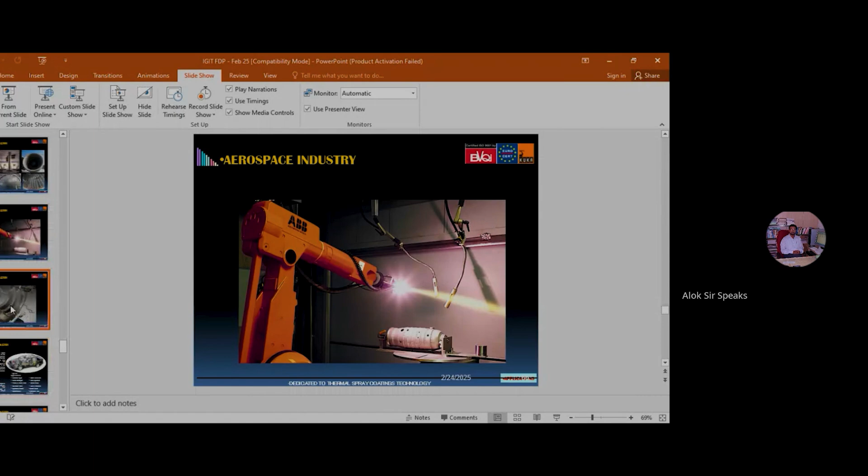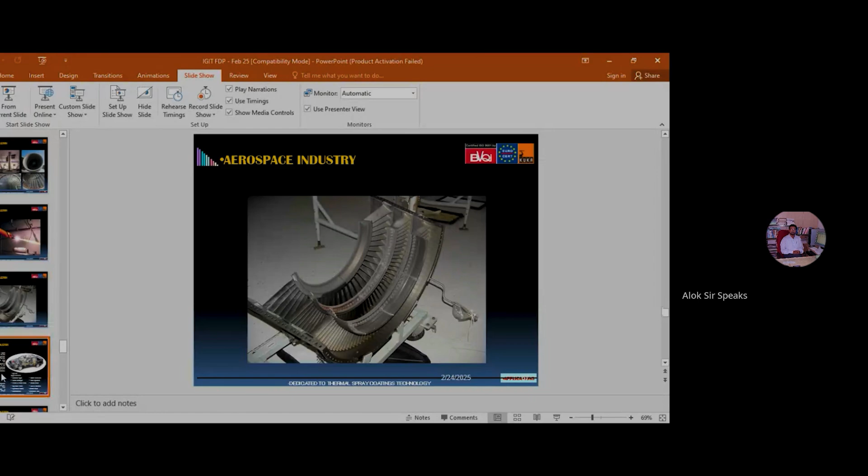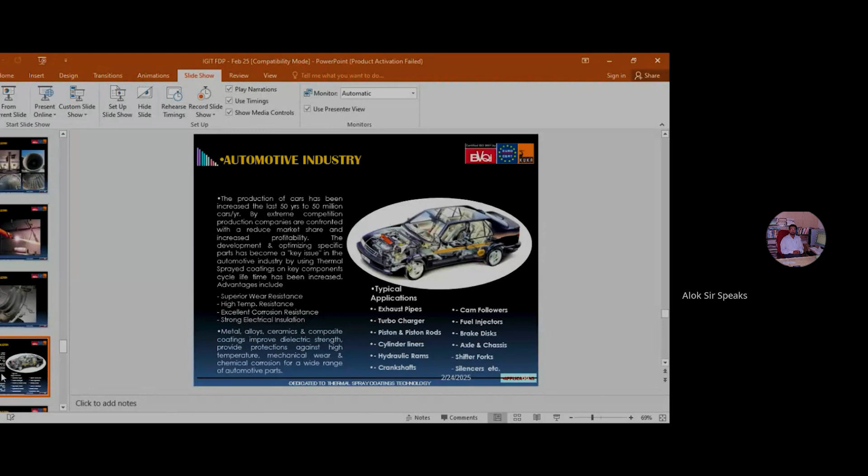Automotive industries, again the list is very long. The exhaust pipes, turbocharger, piston and piston rods, cylinder liners, and brake discs are all coated like this. These are different parts which are coated in the automotive industry, like the crankshaft, the crank, and the connecting rod. They are also thermally sprayed.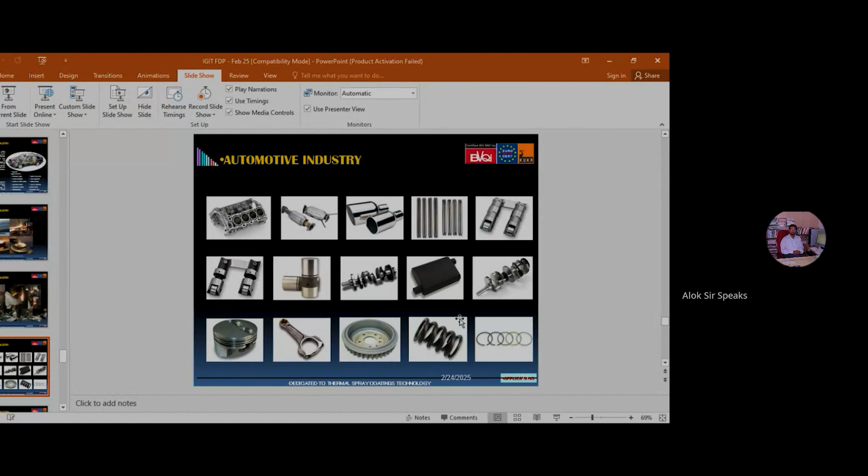In the biomedical industry, you can see the artificial limbs. They are coated with hydroxyapatite, HA material. HA materials are biocompatible materials used as implants. Suppose someone's leg is broken, then one metallic element is placed inside the body. So they need to be biocompatible, compatible with body elements like flesh and blood. So accordingly, coatings are made.

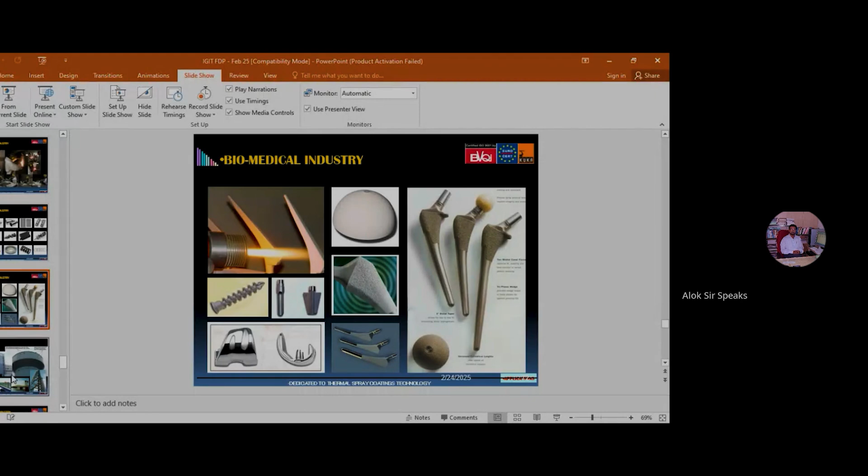Then civil industries, any construction industries, in order to improve their functional life, coatings are essential. Without any surface treatment, there is hardly any component which is being used. Power plant industries, yes, power plant industries, coatings are used.

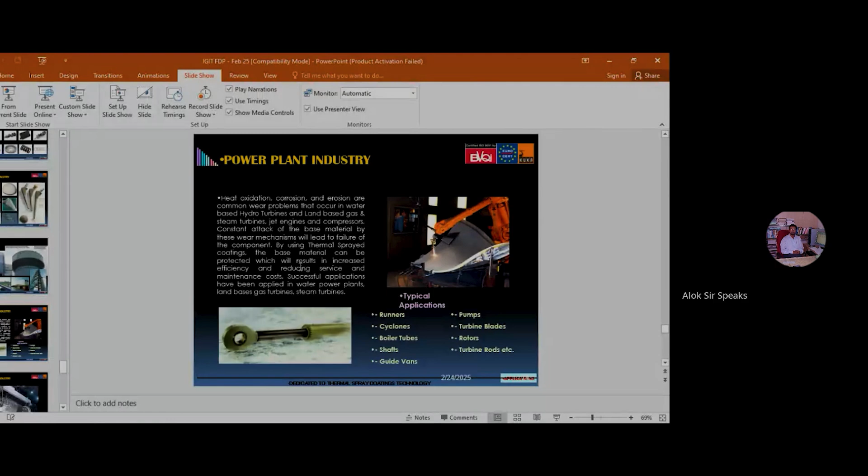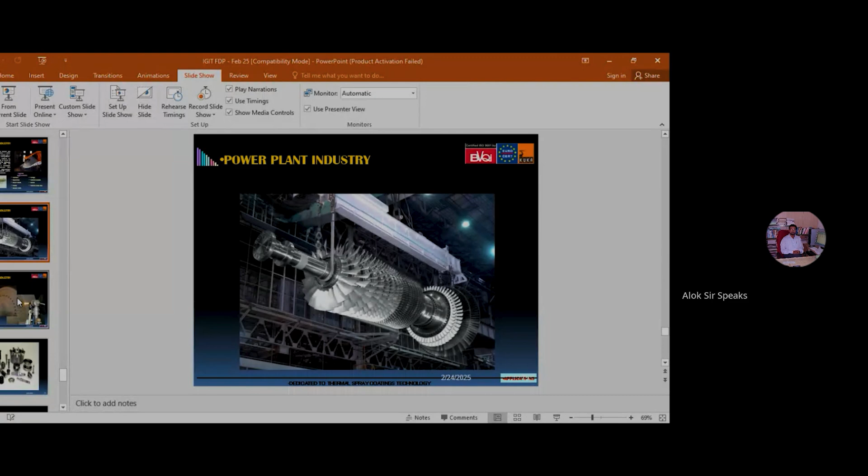This is the open view of a steam turbine, and here the turbines again are turbine blades, which are made up of very delicate material, needing to be coated with delicate material. Of course, industry waste cannot be used there, but exploration can be done.

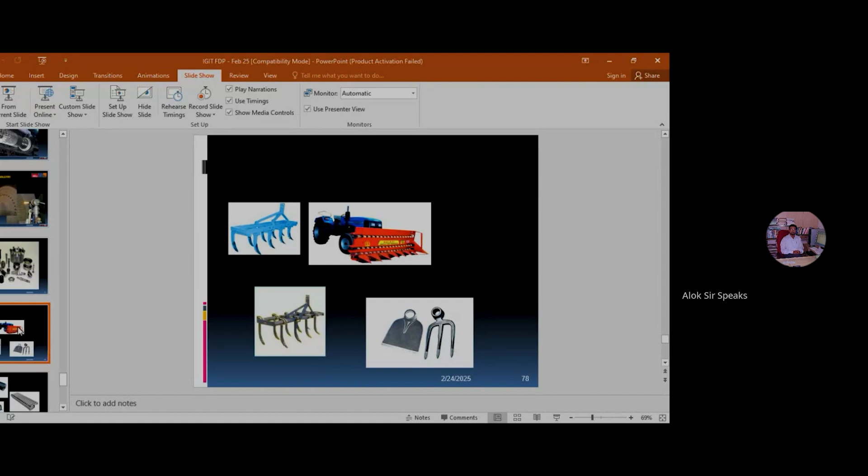Agricultural implements are coated specially, and here industrial waste coatings are very much useful because these are low end applications, and the teeth of all these equipments come in contact with mud and slurry, clay. So they need to be friction resistant and slurry resistant. Industrial waste like marble dust, granite dust, red mud, or fly ash coatings will be helpful for this kind of applications.

Then conveyor belt rollers, this is another application. Then power plant coal bends carrying pulverized coal. So these are some of the potential areas where coatings can be used.

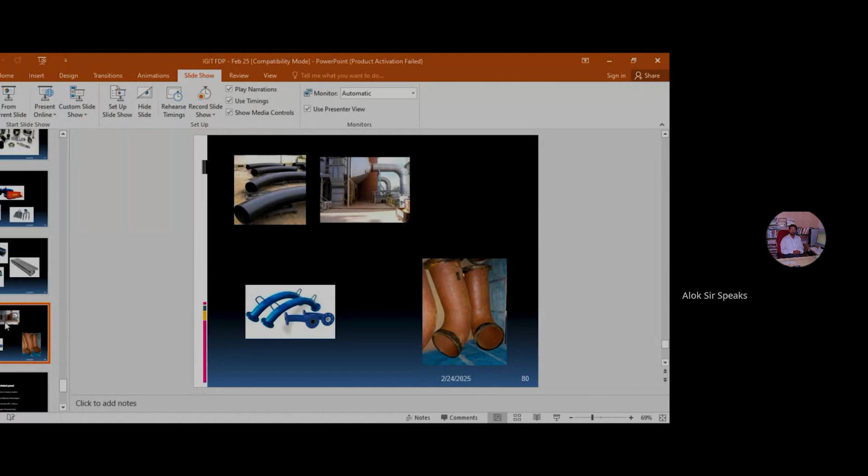Coming to the last slide, I want to tell the same thing I've been telling repeatedly: use of industry waste, construction waste, biological waste, natural fibers in polymer composites, and sometimes these particulates in thermal spray coatings, is a very promising area. So very less work has been done, although you will find a lot of literature on this.

But if you go to a particular industry waste, you will not find more than 10 or 12 papers. So relatively much less work has been done in industry wastes, and even if it has been done, you can try with different matrices, different techniques, hybridize it with another material. Two materials can be taken together and a new composite can be made, and you can add additives to make hybridized composites and hybridized coatings.

Not only wear characteristics, you can also target other characteristics such as electrical properties, dielectric properties, microelectronic properties, mechanical properties, damping properties, acoustic properties, a lot of things. There is no limit to the possibilities. And modeling and simulation is another area which is very less explored, so that can be done.